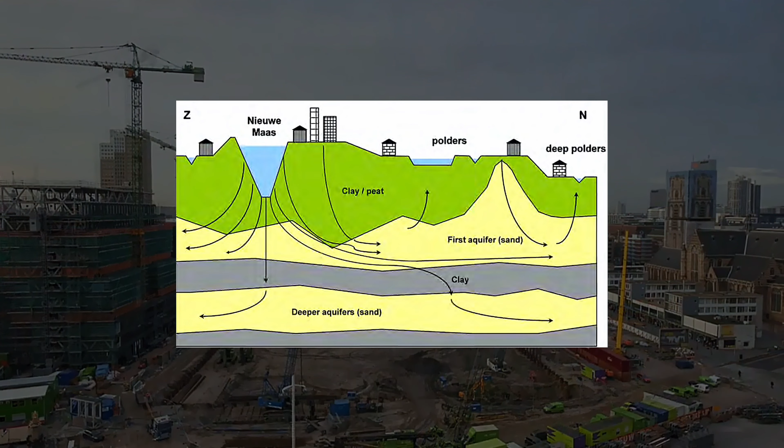In the heart of Rotterdam, where the river Rotte once shaped the land, engineers faced a challenge unlike any other. Last week, we uncovered the hidden battle beneath one of the city's most iconic landmarks, the Markthal, built on reclaimed land with layers of soft peat, clay, and sand. The ground was anything but stable, and just 3 meters below the surface, a high water table threatened everything.

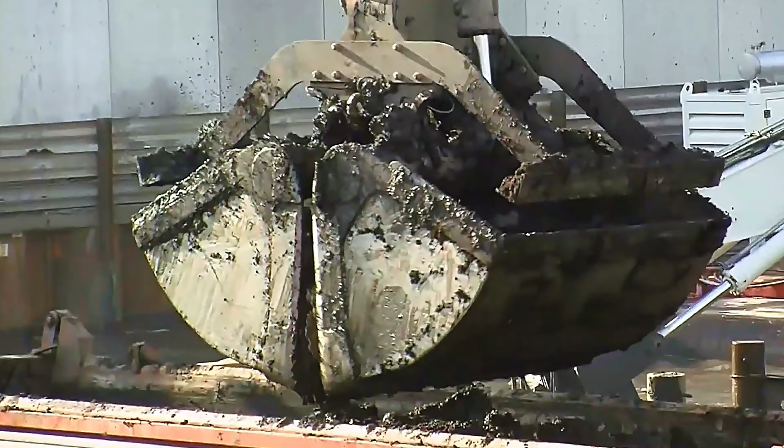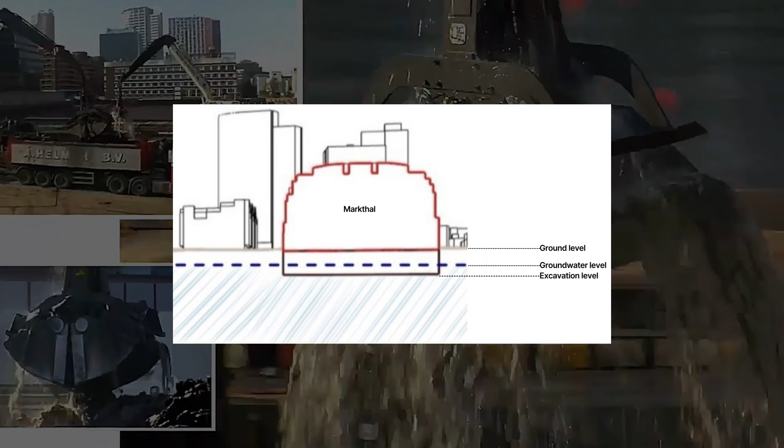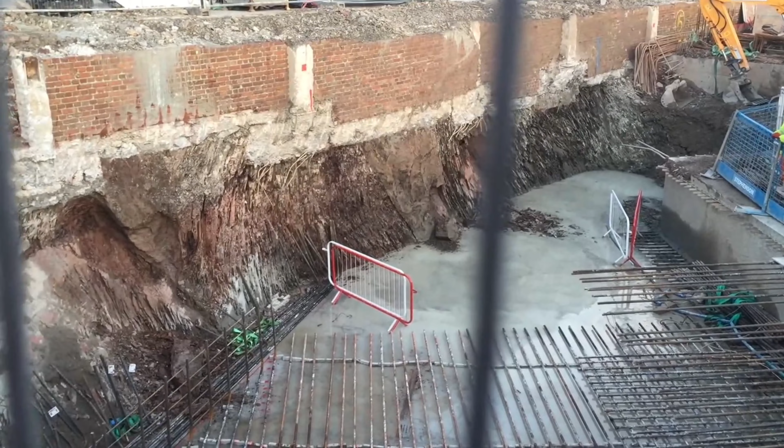As excavation began, trouble surged from below. Upward seepage brought in brackish water, rich in iron and nitrates, turning groundwater management into a high-stakes game. The deeper they dug, the greater the pressure. The risk of bottom heave, flooding, and even collapse loomed large. The excavation pits, if mishandled, could rupture. Roads could sink. Entire structures could shift.

To carve out the Markthal's massive 15-meter deep foundation and underground parking, engineers had to defy the elements, crafting bold solutions to hold back the water and tame the trembling earth beneath their feet. Before the first shovel touched the ground, engineers knew they had to build a fortress, not above the surface, but around it. A complete enclosure wrapped around the construction site, engineered to resist the immense lateral forces caused by hydrostatic pressure from surrounding groundwater.

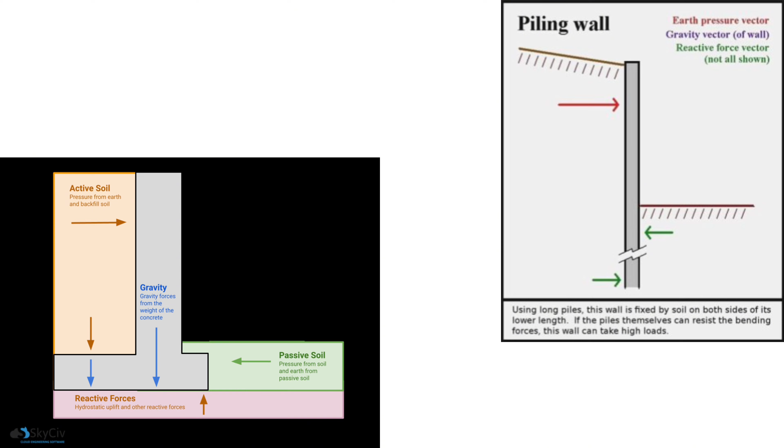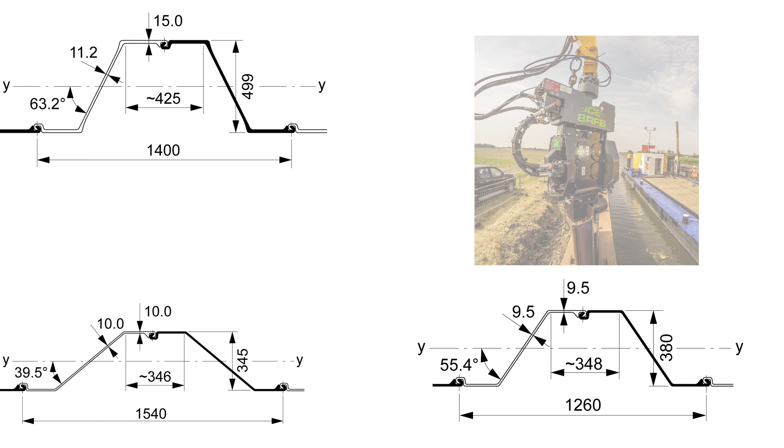To do this, a combined wall system was chosen, a powerful assembly of steel pipe piles and AZ-type steel sheet piles. The 1,020mm steel pipe piles were driven 32 meters into the ground using vibratory hammers. Between these piles, AZ 14-770 sheet piles slid into place, locked together to form an unbroken wall of steel. Around 20 meters of continuous wall structure.

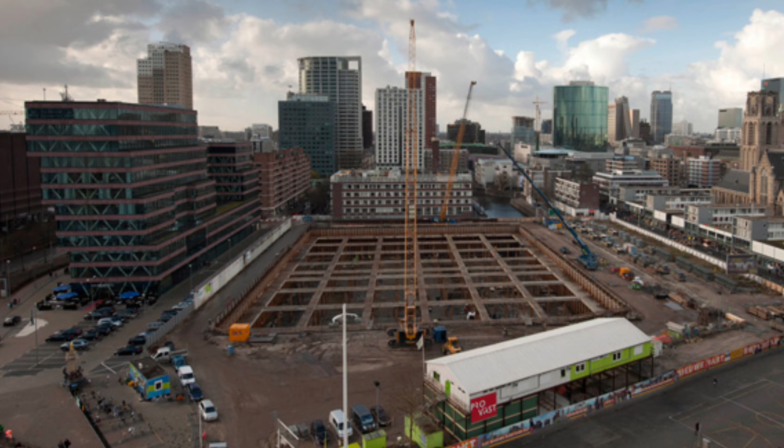Across the site, 168 meters of AZ-18 sheet piles were installed for the main pit. In the archaeological excavation pit, a separate 100 meters around, AZ-36 by 21 to 24 meter sheet pile wall was installed. The combined wall systems are essential in supporting the arch structure in the construction of Markthal. This system enhances site stability by resisting lateral soil pressure, limiting groundwater infiltration, and preventing soil movement or collapse.

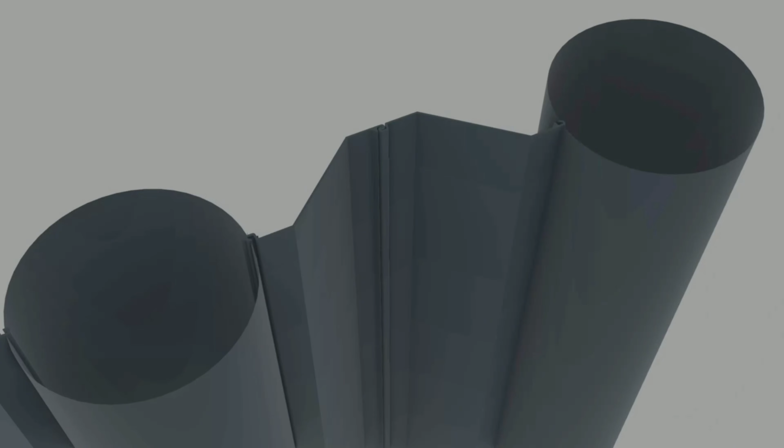The system consists of 2 main components, tube piles and pairs of intermediary sheet piles. Sheet piles are installed side by side with interlocking edges to form a continuous, wall-like barrier. These sheet piles transfer the soil and water pressures to the tube piles, which are designed to bear both bending and vertical loads. The tube piles carry most of the load and are 30% longer than the sheet piles.

The combined wall system plays a crucial role in site stability by resisting lateral soil pressure, minimizing groundwater infiltration, and preventing soil movement and collapse. By integrating the sheet piles into the construction, the overall stability of the excavation was enhanced, ensuring that the Markthal's foundation remained robust against groundwater pressure and lateral soil movement.

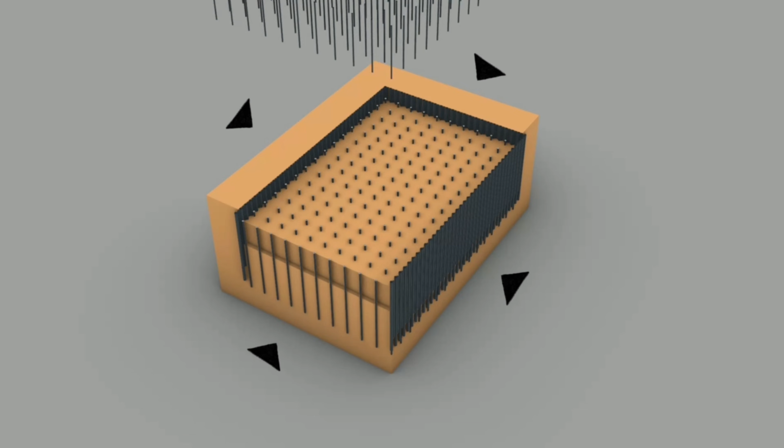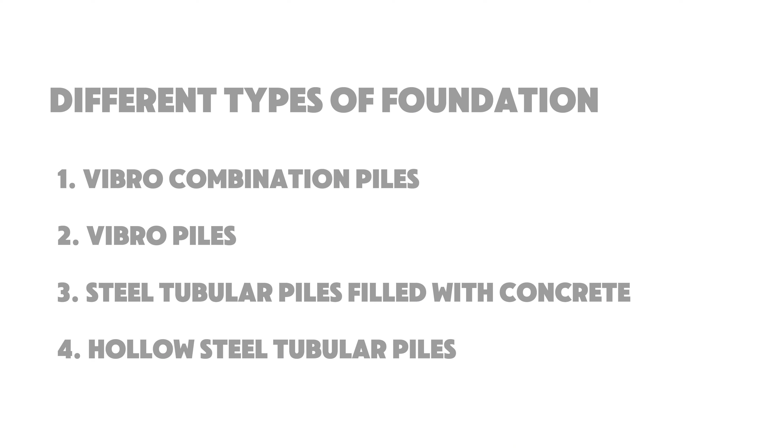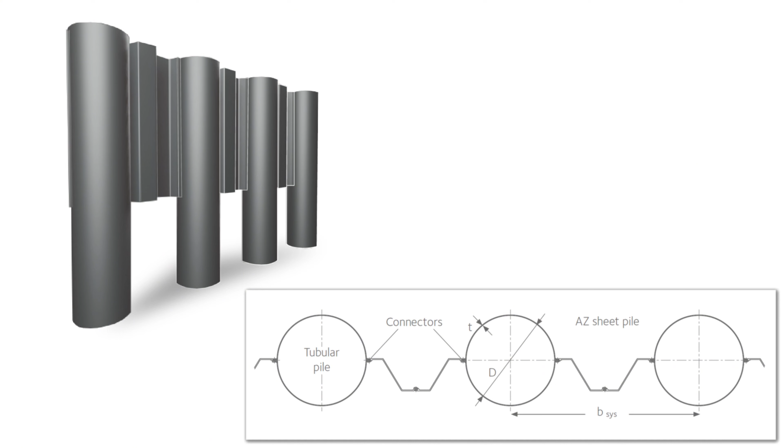Under the Markthal, 4 different types of foundation piles were used. Pile driving of vibro piles was performed at the entrance to the parking garage. Additionally, 2,270 vibro combi piles were installed. To support the concrete strut frames, 122 steel tubular piles were used. In total, no less than 2,500 piles were driven to support the foundation of the Markthal.

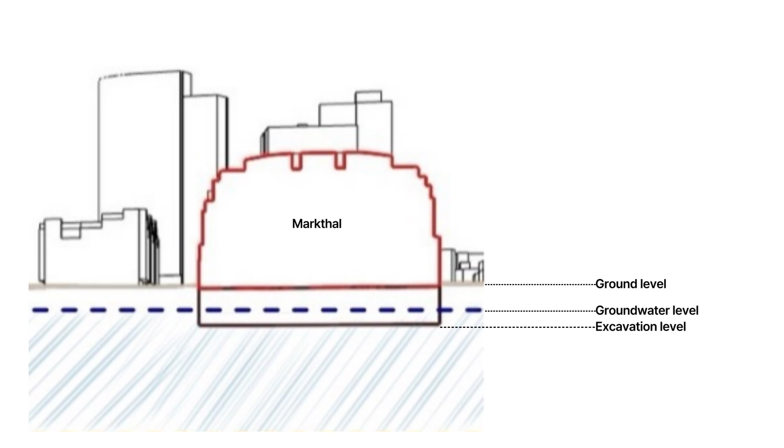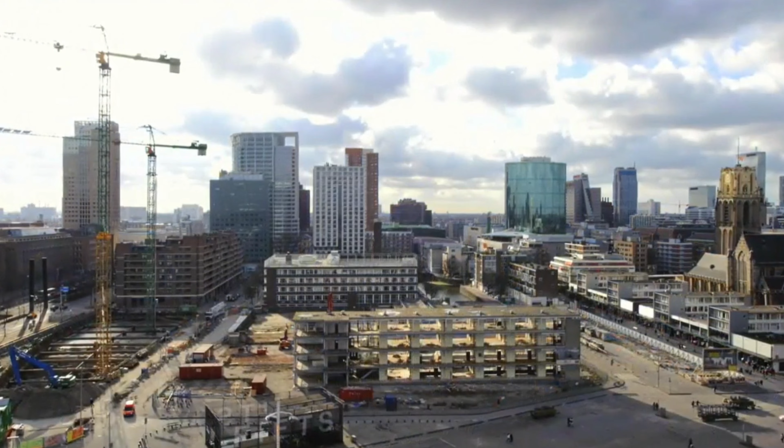The Markthal had a great depth of the excavation pit, which reached 15 meters below street level. The pit had to be stabilized against the upward pressure of groundwater. To counteract this force, the piles initially served as tension piles. In the final stage of construction, these same piles transitioned into compression piles, supporting the weight of the Markthal structure. Let's see how the piles handle underwater soil through skin friction.

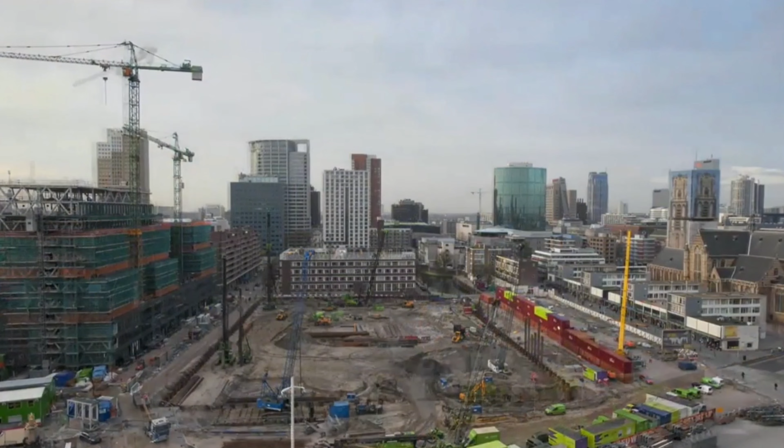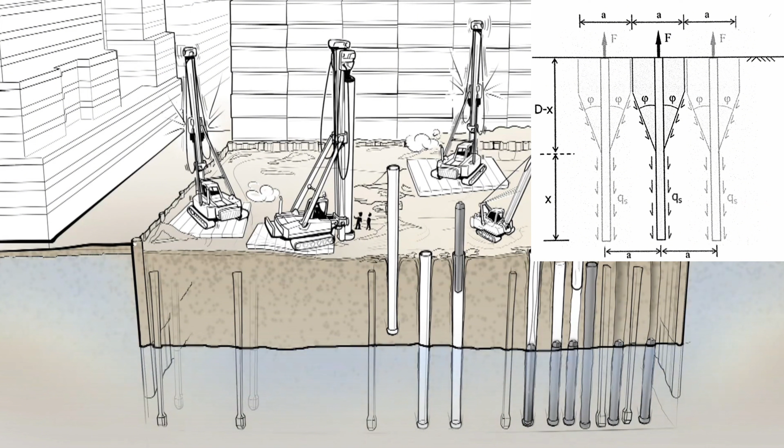These piles act like a tensile pile. Tensile piles, also known as tension or uplift piles, resist upward forces caused by hydrostatic pressure. In our site, which is clayey, the effectiveness of these piles depends on the interaction with the surrounding soil through skin friction. When the pile is driven into an oversized hole within clay soil, concrete grouting was used to restore the pile-soil interaction. By filling the annular space between the pile and surrounding soil with concrete, the grouting ensures intimate contact, restores skin friction, and enhances the pile's tensile capacity, thereby increasing its load-bearing capability.

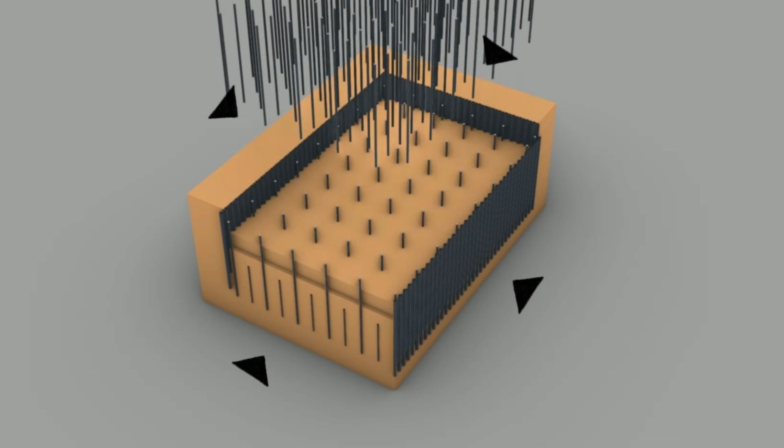The construction process involved driving 30-meter-long steel pipe piles into the ground. Inside these steel pipes, 15-meter-long concrete piles were placed. The tops of these piles were positioned 15 meters below ground level. The space between the steel and square concrete piles was filled with concrete and soil, enhancing friction resistance. Once this process was complete, the steel pipes were removed.

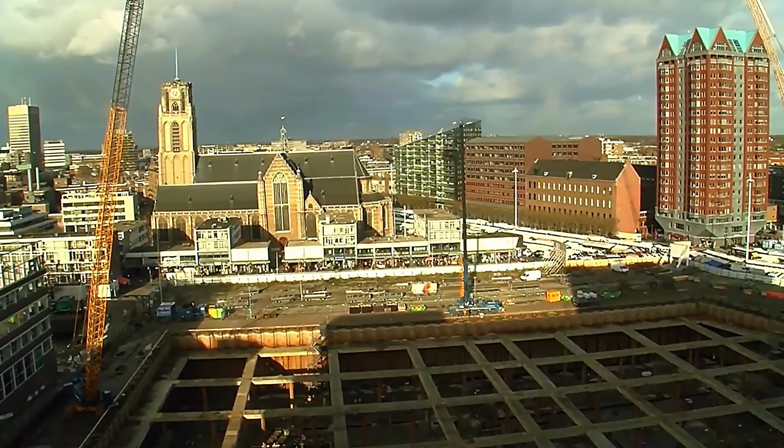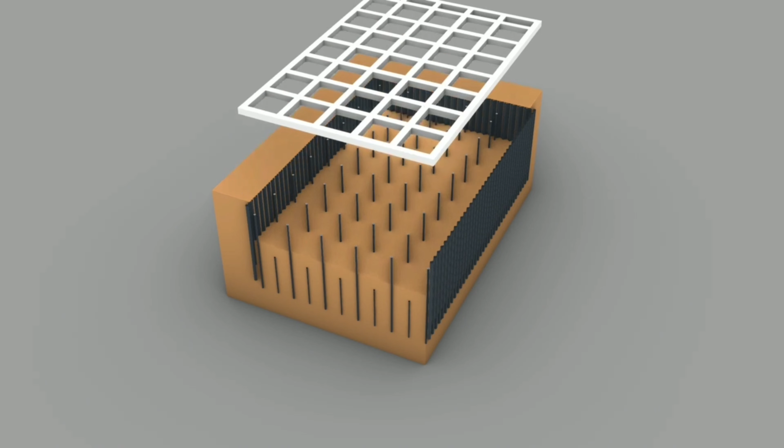After pile driving, deeper excavation was required. However, the sheet piles needed additional reinforcement. To stabilize the excavation, a concrete strut frame was constructed. This frame prevents the sheet pile walls from being pushed inward during deeper digging. The strut frame serves a dual purpose. It holds back lateral earth pressure.

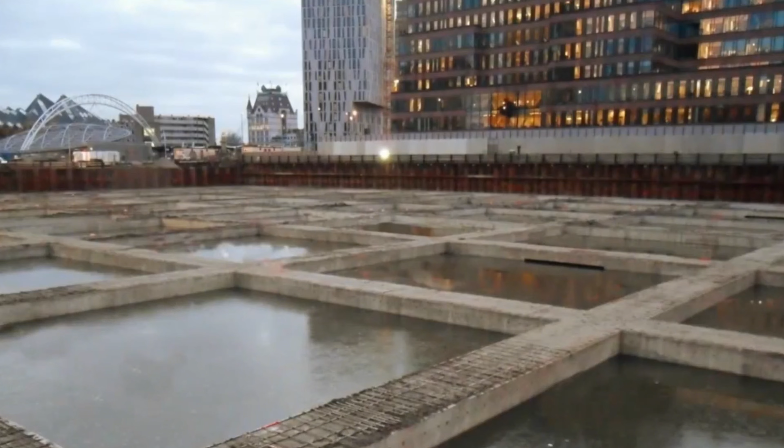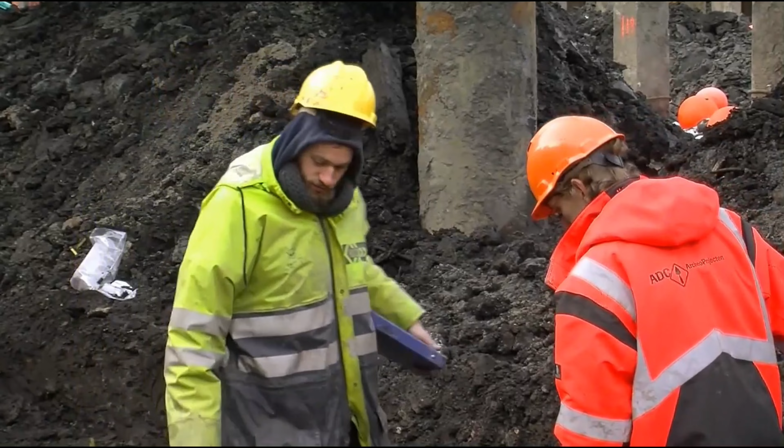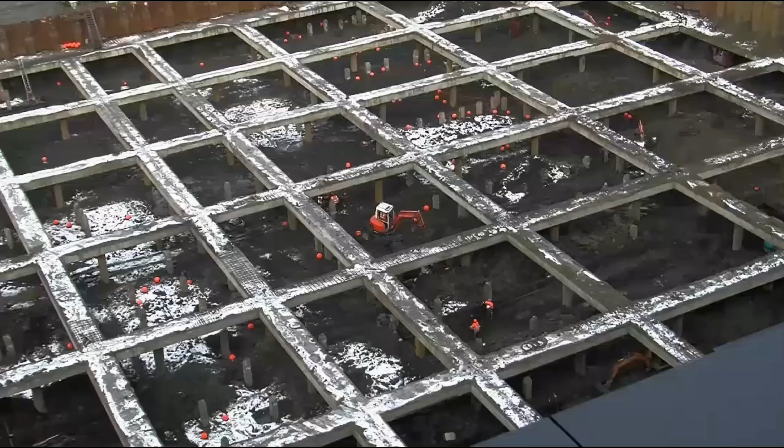First, it will become the future -1 floor. Second, integrating construction and design smartly. This base floor is built extra thick for strength, but includes temporary openings. These are closed later to complete the floor slab. Groundwater is lowered, and old foundations, including wooden piles and masonry remnants, are removed. This approach aligns with the top-down construction method, where permanent structural elements are used early in the excavation process.

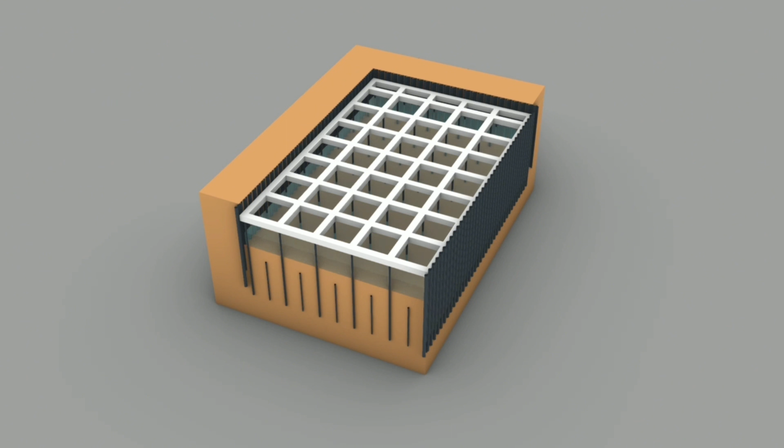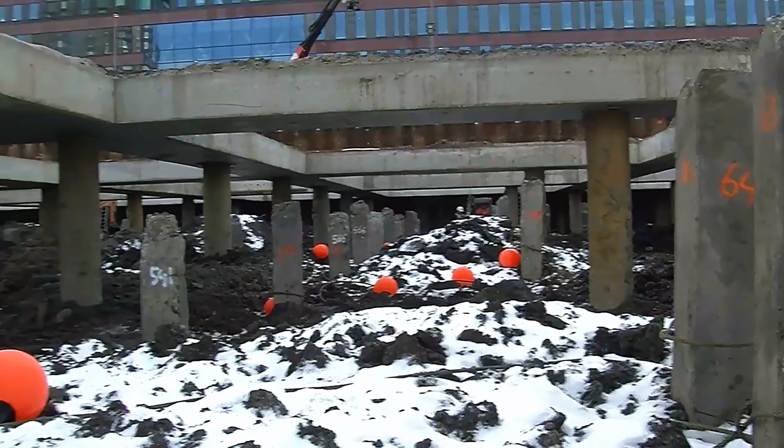To safely excavate down to 15 meters, the construction pit was filled with water. This water provides necessary counter-pressure to balance soil and prevent uplift or collapse of retaining walls. Floating pontoons give cranes access across the water-filled pit. Red and white floats mark the open spaces of the strut frame. As the crane arm must not touch the concrete frame, extreme precision is required.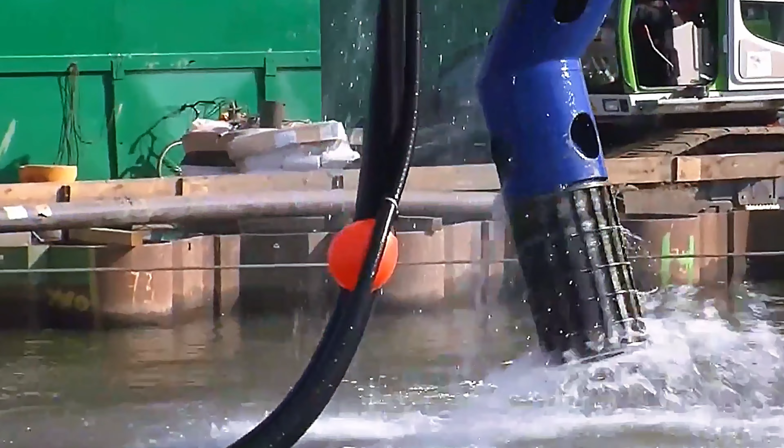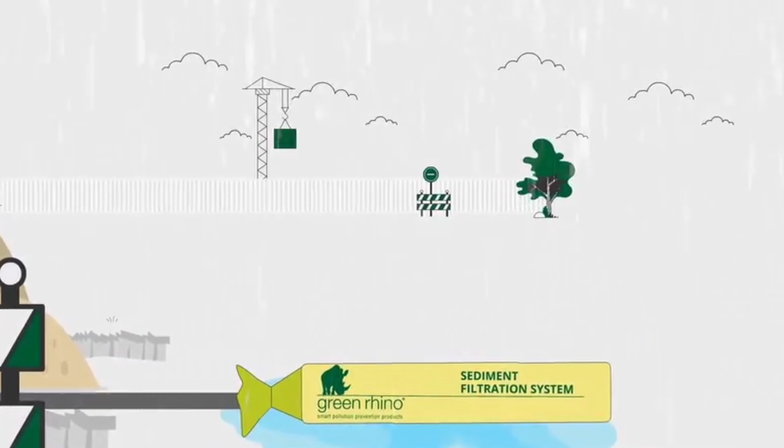At the bottom of the pit, 246 old piles remain. These were digitally mapped, and the crane operator uses GPS for precise digging. The crane operator located the old piles using GPS-guided crane systems, carefully removed one by one. To reduce soil transport, a silt depot filters out sediment from the water. This process reduces truck traffic dramatically, from 250 trucks per day to just 12.

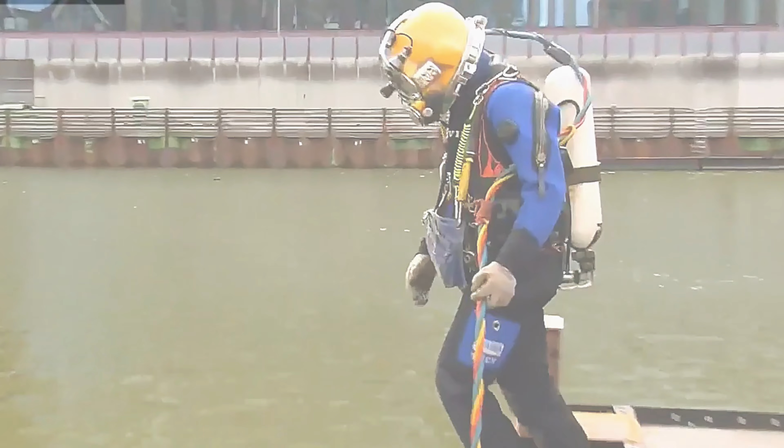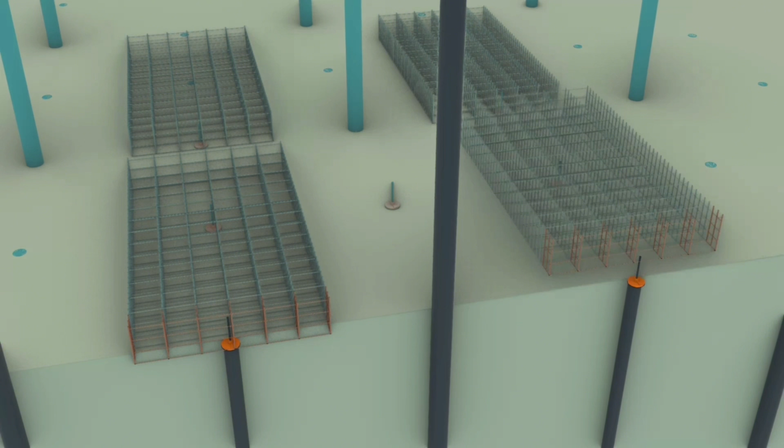At 15 meters depth, a thick layer of mud covers the bottom. Divers locate new pile tops and screw in threaded rods. After that, they lay down a 0.5 meter gravel layer to prevent mixing with the concrete. Meanwhile, rebar cages are welded on land and assembled underwater by divers. Underwater concrete work went on for 3 days and 3 nights.

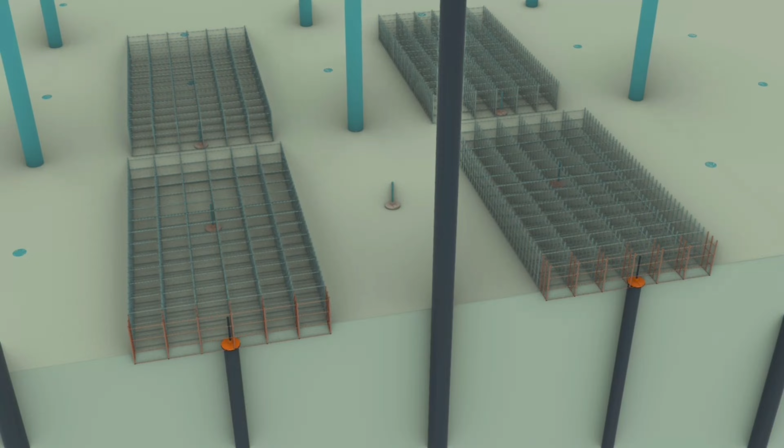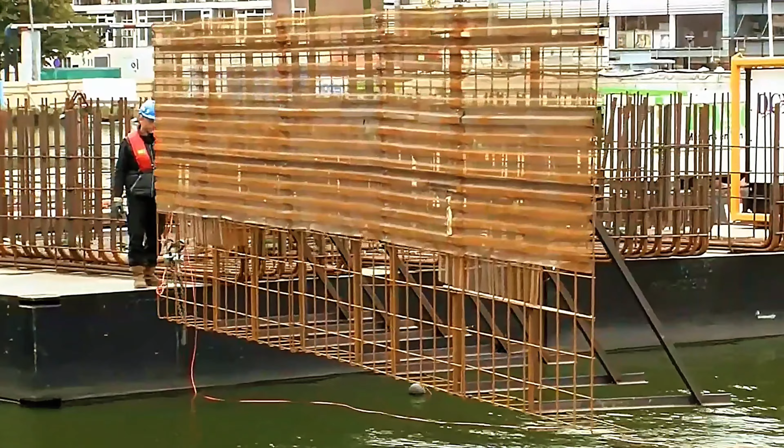Underwater workers operate in near total darkness at 15 meters depth. They locate the pile tops, screw in threaded rods, and lay down gravel to avoid contamination. Steel rebar cages are welded on land and assembled underwater by divers. It's time-consuming but essential for the foundation slab. Once everything was prepared, underwater concrete pouring began.

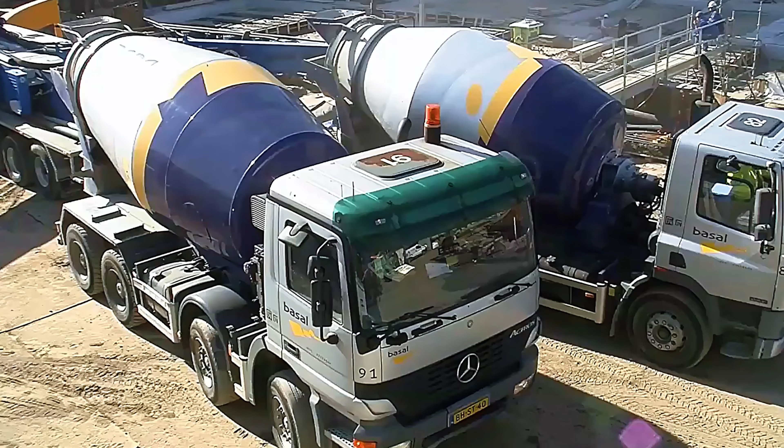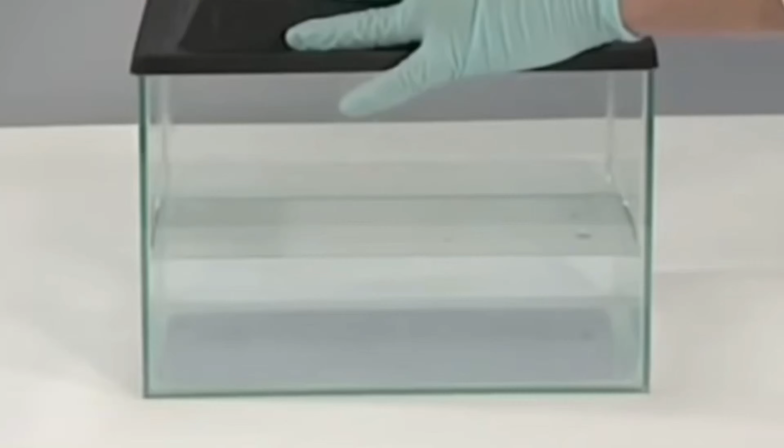A 1.5-meter thick slab was poured at the bottom of the pit. This required 2 special concrete pumps and around 1,500 mixer truck deliveries. In total, 14,000 to 16,000 cubic meters of underwater concrete was poured. This specialized concrete can be placed underwater without mixing with surrounding water, as the reinforcement is already in place on the bottom and the concrete must spread evenly across it.

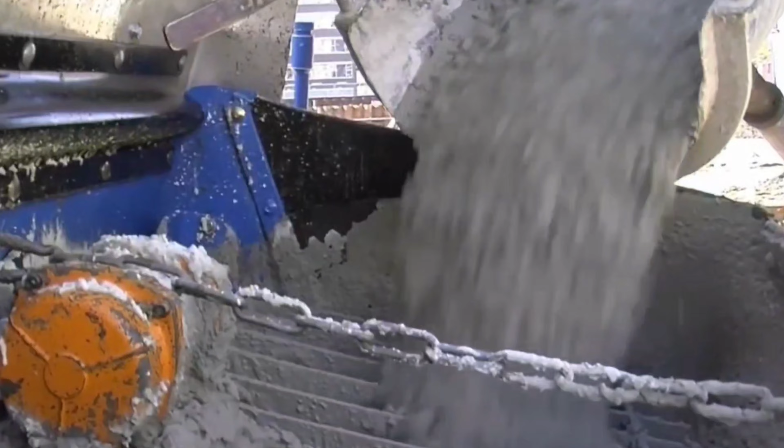The biggest challenge is keeping all machines running. Any stoppage would create a joint, a weak spot in the slab. Divers monitored coverage in real time, while the concrete is left to cure underwater. The construction teams take part in a dragon boat race on the water.

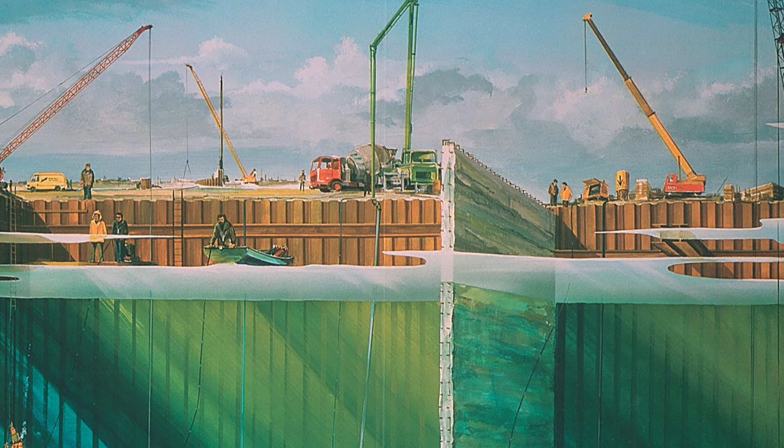Over the course of 2 weeks, the construction pit is gradually pumped dry, approximately 14 million liters of water at a rate of 3 centimeters per hour. This slow pace allows the pressure on the foundation to increase steadily and safely. The sheet pile walls are tightly interlocked and watertight, while the underwater concrete floor is smooth, level, and 1.5 meters thick, forming a solid foundation for the Markthal.

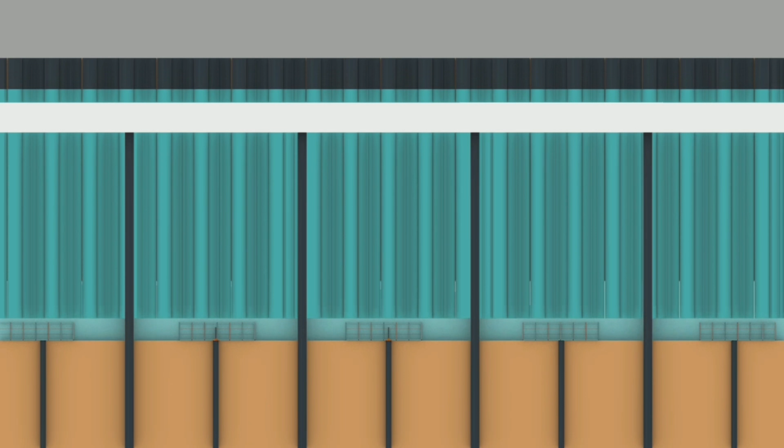Minor water leakages were managed by pumps, and the immense structural forces naturally compressed and sealed any cracks. The strut frame has been pushed inward by about 4 centimeters due to soil pressure, but this remains well within acceptable tolerances. Ultimately, the process reveals a watertight and structurally sound base capable of supporting loads of up to 12,000 kilograms per square meter.

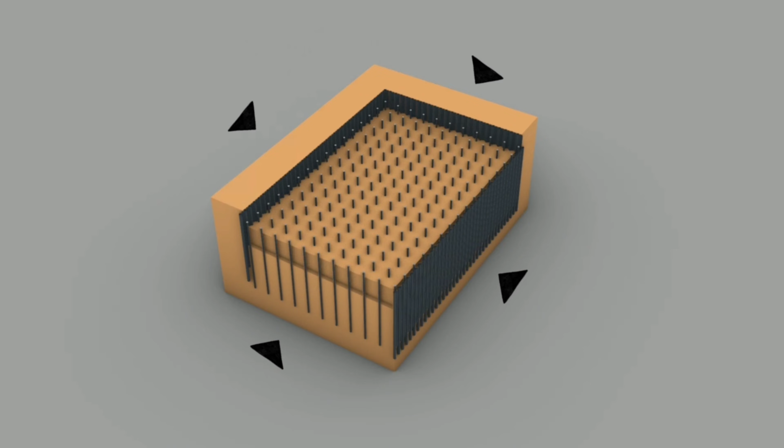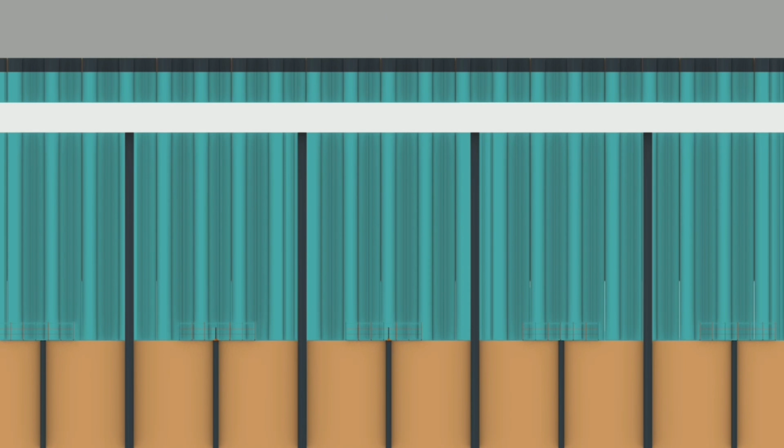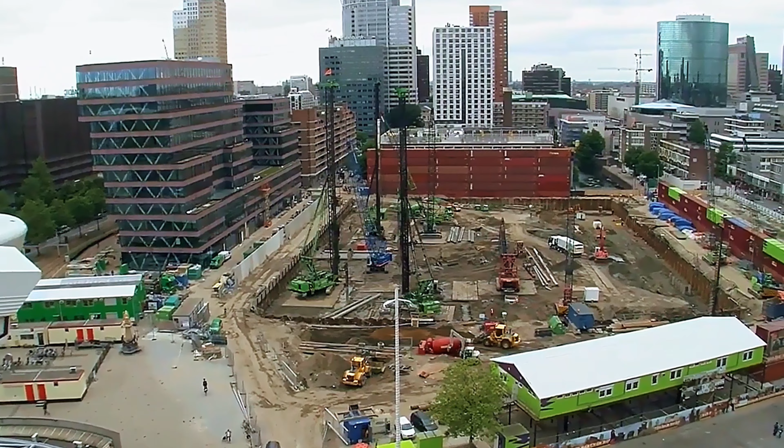Today, we looked at the engineering solutions used in the Markthal project to overcome significant underwater construction challenges. After laying 480 tons of reinforcement, a 1.5-meter thick underwater concrete floor was poured and allowed to harden. Once set, the water was gradually pumped out, revealing a smooth, watertight floor capable of supporting up to 12,000 kilograms per square meter. With the foundation successfully completed, construction is now progressing according to plan. The focus has shifted from excavation and deep foundation work to building upward.

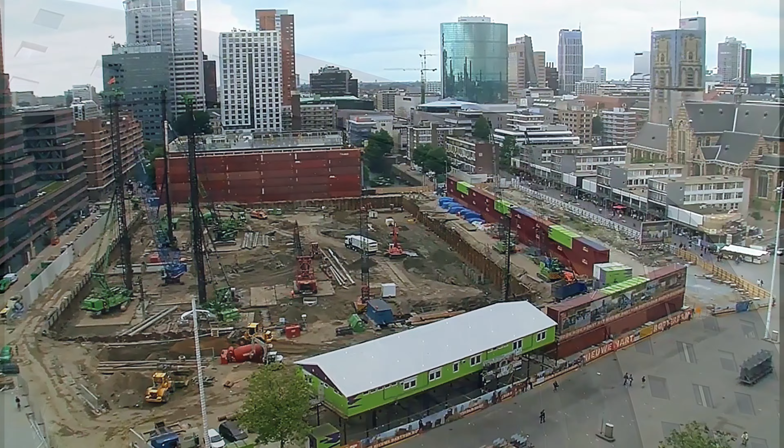For the first time, the deepest point of the Markthal has become visible, a major milestone that was celebrated with local residents, marking a proud and symbolic moment for both Rotterdam and the Netherlands. Clear evidence of months of groundwork can now be seen. Rebar cages, threaded rods, and anchors protrude from the gently curved concrete floor, awaiting the final finishing layer. This surface will ultimately support the heavy loads planned for the space above.

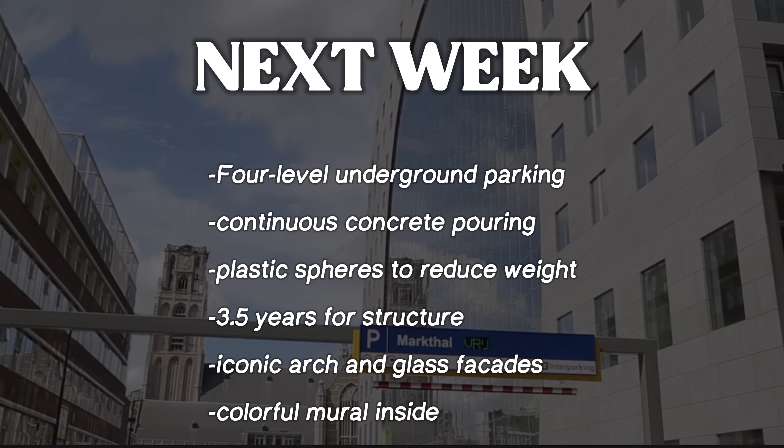The next significant phase is the construction of a 4-level underground parking garage, including retail and loading zones at the -1 level. This year-long process involves continuous concrete pouring, day and night, using more than 5,500 concrete mixers. To reduce the weight of the concrete slabs, plastic spheres are embedded within the floor structures, an innovative approach to optimize strength while minimizing mass.

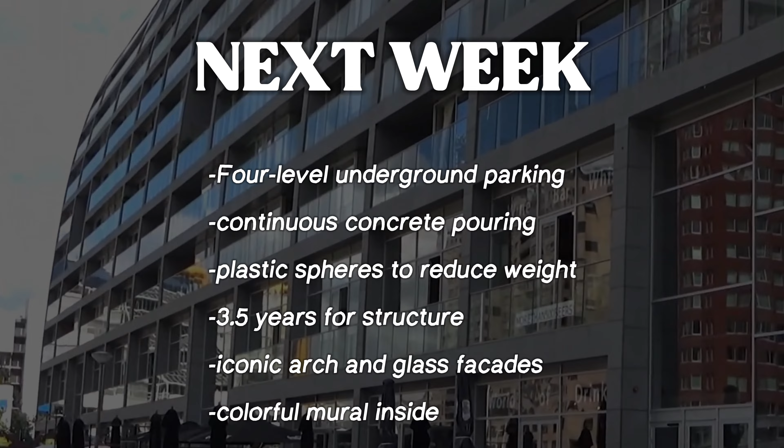In just 5 months, the 4 underground garage levels are completed. After 3.5 years, the entire concrete substructure is finished, and work begins on the superstructure, including the Markthal's signature arch. This iconic arch is constructed from concrete with steel cables supporting massive glass facades at either end. Inside, the structure will be brought to life with a spectacular, multicolored mural, creating a vibrant and immersive interior atmosphere.